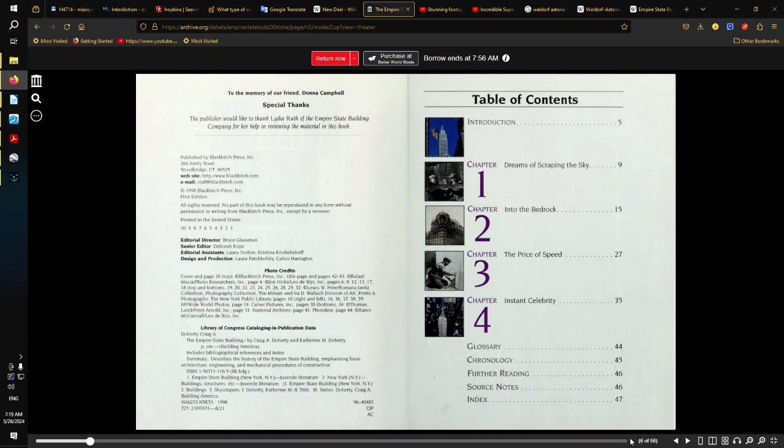So the way things get super weird about this is, officially they say on March 17 the first structural steel was set in place. So keep that in mind, March 17, 1930. And of course, they're saying the demolition was complete in January of 1930.

So I think I'm going to start at the Waldorf Astoria. This is supposed to be a picture of it, not long before it was demolished. The things to keep in mind about the Waldorf Astoria, it was not like a little building or anything. It was supposedly made up of two different buildings, the Waldorf and the Astoria, who decided to become partners at a certain point. As Wikipedia says about the Waldorf Astoria, constructed in the German Renaissance style by Henry Janeway Hardenbergh, it stood 225 feet high, with 15 public rooms, 450 guest rooms, and a further 100 rooms allocated to servants. Now that's the Waldorf.

The thing is, when we put those two together, it's just a behemoth. It's such a huge, massive place. 225 feet high, so it had somewhere in the neighborhood of about 18 floors or so.

But the thing is, when they combined it, so what we were looking at here, Waldorf and Astoria together, connected by about a 300 foot long corridor known as Peacock Alley. After the merger in 1897, the hotel had 1,300 bedrooms, making it the largest hotel in the world at the time.

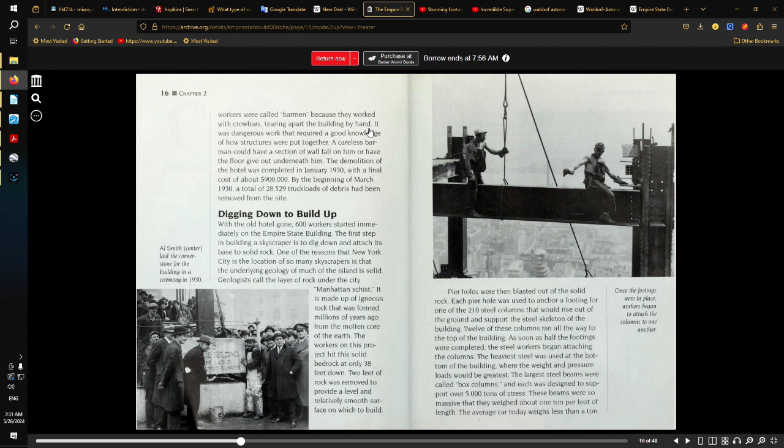I don't know of too many that would rise that high where that would be the case. Again, you'd have to be for sure down to bedrock, and you'd want to tie that in with steel to the rock. This isn't something they say they did, but most tall buildings today use combinations of the two: long pilings down into the rock, and oftentimes a very thick, absolutely supported footer with so much rebar you wouldn't believe it, to hold this tall building in place and level, because the last thing you want is a building that's 1,400 feet up in the air to tip even a little, even a tiny, teeny, weeny bit. But we'll see from the video they've published how they say they did the foundations.

This book mostly goes through the basic kids' story version, but what we have to believe is that they began building the foundation in mid-March of 1930 and finished it by mid-March 1931. And of course, they have to claim they were essentially building 4 floors a week, and that's for the whole thing, not just the steel framing and this really special, interesting terracotta floor plan.

They say they put in these long members, shaped pieces designed of terracotta, that fit together in sort of a puzzle style. Think of how an arch is done with brick, block, or stone, with a keystone in the middle holding it very strong, it was similar to how they say they did that between the steel girders. And then they say they poured concrete on top of that. So there's all that just to the construction of it.

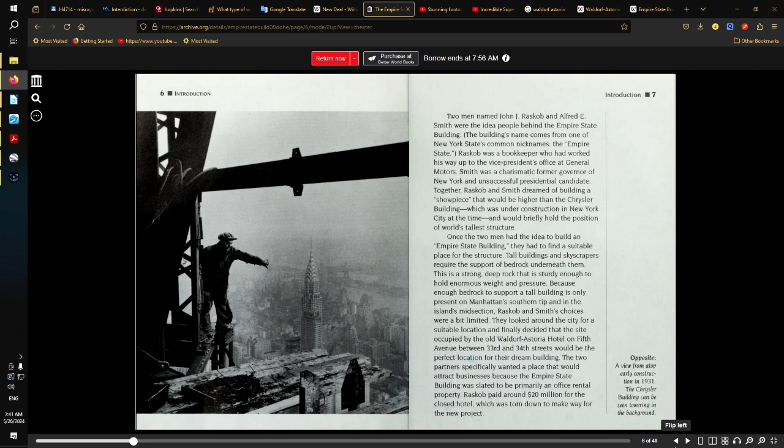So we'll try a few other pictures here. Again, just ridiculous, the things you have to believe about these men. You have to believe they have no safety gear on, and they're on what looks like steel framing a thousand feet in the air, because the only framing members I could imagine being rounded like this would be up in the capital. So we're a thousand feet in the air, up there with those high winds and everything, and they're just hanging out here—this guy's straddling, this guy's just sitting there with his foot.

Well, he's a little more safe than this guy, who doesn't look too right in the head to begin with. No harnesses, not tied off, no safety, high winds. I guess they don't have families to feed. I guess if they fall off this building and die, it won't affect anyone. Good for them.

So again, it's not hard to believe we're looking at a stock photograph, and we don't know how many photographs this regime had, taken from the once likely very prolific amount of dirigibles there were. When you look at some of these Art Deco buildings that still exist from the old world, you see a lot of capitals on them that appear to be, if not a dirigible docking station, something similar.

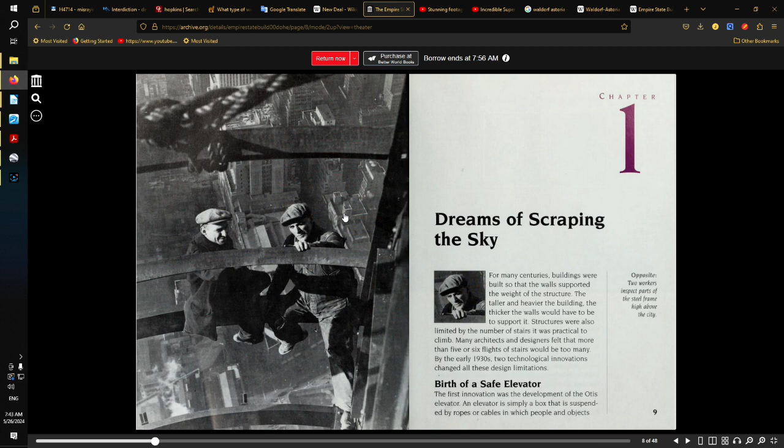And they do admit that somebody had the crazy idea of making that capital at the top of the Empire State Building a dirigible docking port, but the winds were too high and they couldn't pull it off. Well, the funny thing is, if you check other cities in the world, they have the same kind of capital on them. So it appears a lot of people had the same idea - all of them really bad ideas, I guess.

So again, we've got a picture here that's entirely out of context. And by the way, this vertical steel beam we have here does not actually look like the Carnegie beam described in the film. Now, what they say they used for all the heavy lifting on this project were guy derricks - essentially the early form of a crane.

It was essentially built out of steel - well, we had a mast. You would have a vertical mast here, and then a boom out here that would do the lifting. It would swing around 360 degrees, all run by cables.

The thing is, they would have to be secured down to whatever platform they were on very, very well, especially if they're lifting beams like this, which were said to weigh essentially a ton every linear foot. So you got to figure, if that's 30 feet or so, that's 30 tons. We're talking about a crane that really has to handle a whole lot of weight.

And the problem, besides this picture being completely out of context - we have no idea what's really going on here - is that they keep showing us: here it was when they were putting in the foundation, here it was after 12 stories, here it was after 50 stories. Every time we've got these guy derricks up there doing the work, but we have no idea how the guy derricks got up there.

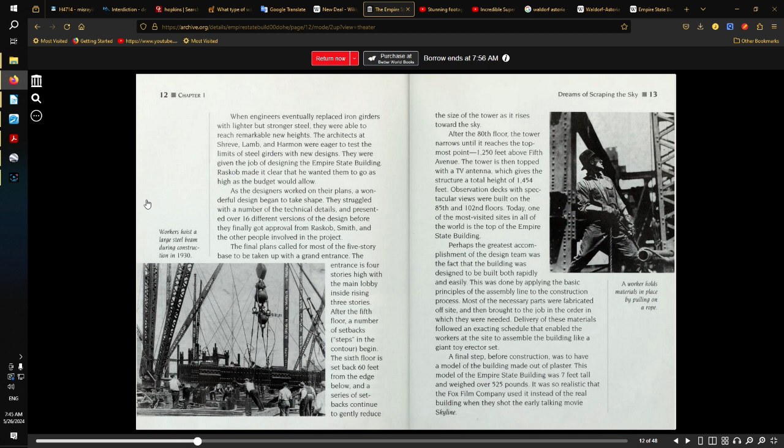The funny thing is, today we have tower cranes used to build buildings. Tower cranes are brilliant pieces of machinery and engineering, and even those, oftentimes, to build them in the first place, you need cranes to build the tower cranes. So I would love to know how exactly they were getting these cranes up story to story to story and still working at such a breakneck speed as they said they did.

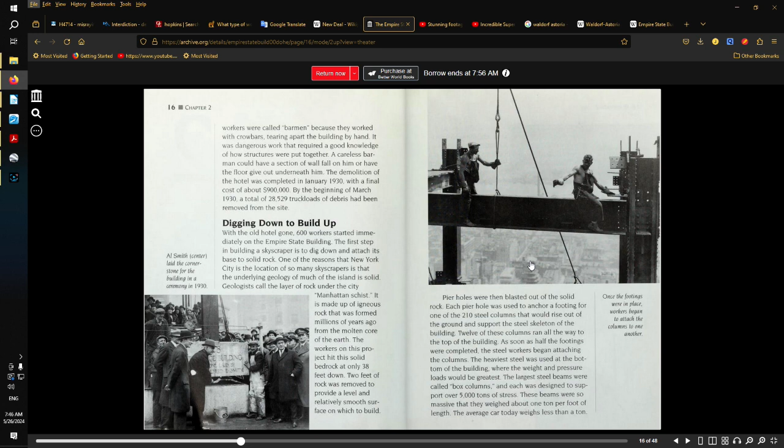So again, is this to the right two construction workers sitting on a girder hundreds of feet up in the air over the city? Or are these two guys on a set with a superimposed city background? It's amazing just how blurry and undefined so many of these backgrounds are.

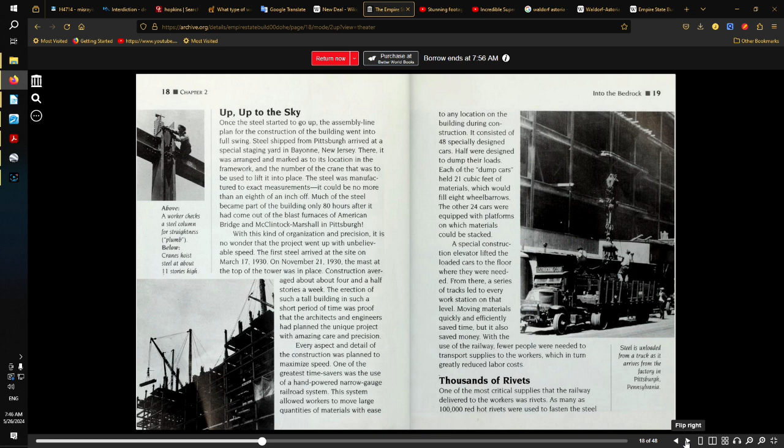Now, there are people who take photos and film of New York, Chicago, and other big cities from the tallest skyscrapers, even on hazy days, and the city doesn't look that hazy. Same thing with this photo - hazy, hazy, hazy in the background, and nice and sharp and clear in the foreground.

And now this one is highly suspicious, because in order to do the steel construction like it was done on the Empire State Building, you would have to connect - we'll see this in the film footage - all of these beams would have been milled, like all the holes for all the rivets, before it was shipped from Pittsburgh out to the site here in Manhattan.

And they would have to lower these beams into place and line up these holes, and then they would have to put in the rivets. The riveting process would consist of pretty much 4 people.

The first guy would heat the rivet red hot. They say he would toss it to the catcher, the guy with the bucket. And they actually claim that these guys who would heat up these red-hot rivets would grab them with 3-foot-long tongs and toss them 50 to 75 feet vertically, accurately. They try to make an excuse for how incredulous that sounds by saying you can throw something vertically farther than you can throw it horizontally. No, you can't. Not if you put a good arch in it horizontally.

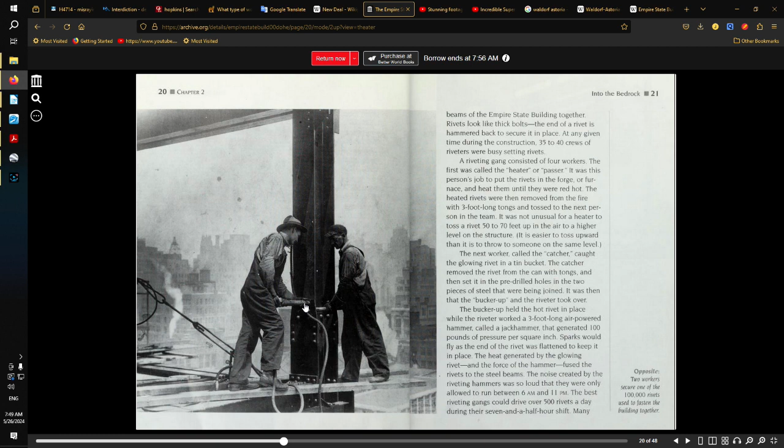The problem is, in this picture we have the bucker up on one rivet and the riveter on another rivet. That's not going to work out too well if that was actually reality. They posed for another picture, and this time the bucker up got it right. Good for him.

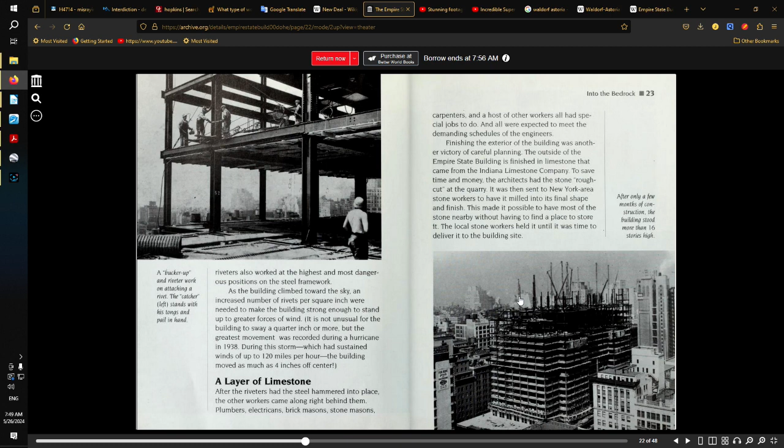Now, of course, we do have various pictures that we're supposed to believe are the building under construction. The guy derricks always look very odd and suspicious in these. In fact, there's one scene in that film where one of the guy derricks, at least the boom on it, looks like it's transparent. Hopefully I can find that as we go.

Now this is one of few photos they claim was an interior of the Empire State Building as it was being formed. Below this little guy having his lunch, these are supposed to be those terracotta boards or beams that would go between the horizontal steel members, the girders. After this we get some more crazy pictures.

Now this is the funny thing. Again we have this background that is extraordinarily blurry as opposed to the foreground. But this is one of the photos I find remarkably incredulous. The caption says, 'Some workers put themselves in great danger while on the project. This man is scaling a cable.'

High above the city with no safety equipment. And we don't see anybody with any safety equipment, because we have to believe they were completely willing to put their lives at risk at all times. And only, depending on what story you believe, only 5 or a dozen men died, but they can't really agree on that, as per usual. The problem I have with this, besides this guy looking like he just came from a deodorant commercial...

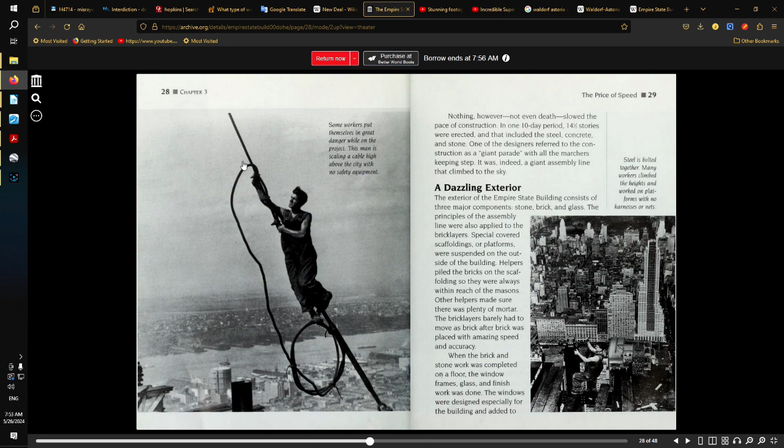So in oversized bibs, he's scaling this wire. We're supposed to believe that he can actually keep himself on the upper side of this wire without falling down beneath it, and that he's pulling this extraordinarily heavy wire up here and clamping it as he goes. Sure thing.

Now, I'm not sure if there are too many other interesting pictures like that in here. There really isn't. Then we get to the finished building, of course, from there to there. So here's the real interesting part. This is the stunning footage of the construction of New York's Empire State Building. They've taken various old clips and put them all together, colorized them, and said they did some digital corrections. It needed a little bit of correction, so they applied that too.

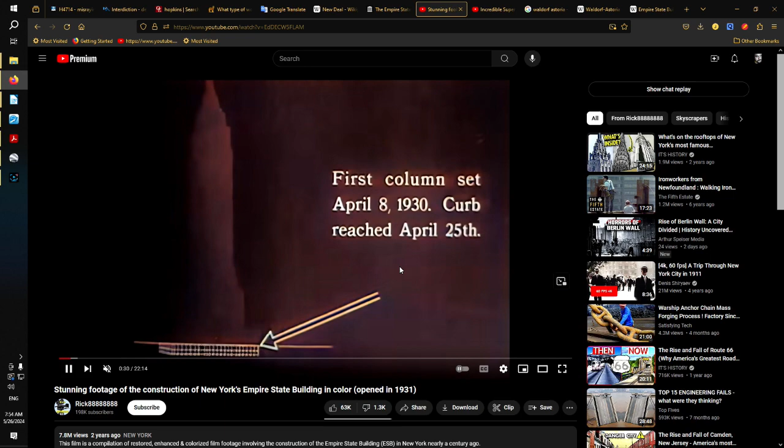We'll start where they say the first column is set, April 8th, 1930, and they say the curb reached April 25th — that's 3 stories underground. They say they reached that point. Now remember, they didn't even start on the foundation until March, and they say they're already setting those initial steel beams, which were a lot different from all the beams that followed them.

They do have a portion in this video of a guy showing how they were constructed, along with animations. Now, something I'd like you to notice: this is supposed to be a sweeping shot of them laying in these special kind of footers that they used. I have to assume, because nobody's talked about this yet, that somehow they tied concrete pads to the bedrock. They say the bedrock is only 30-something feet down from the curb or street level. So we don't really know exactly how they did that.

I would think that would take quite a lot of time and work. You'd want to put in vertical rebar at least, as well as horizontal rebar, and tie that all together. It's a long process and necessary too, but we don't know anything about that. And then they would put the steel, part of the footer, on top of these pads. I believe they would pour concrete all around these, and then those initial foundation beams — these super heavy ones that weighed like a ton per linear foot — would be set on this and erected. Then they would put the girders between, and you would have that first level.

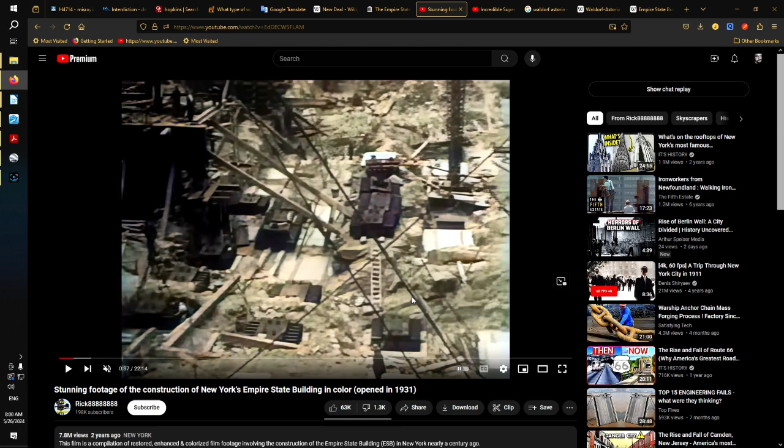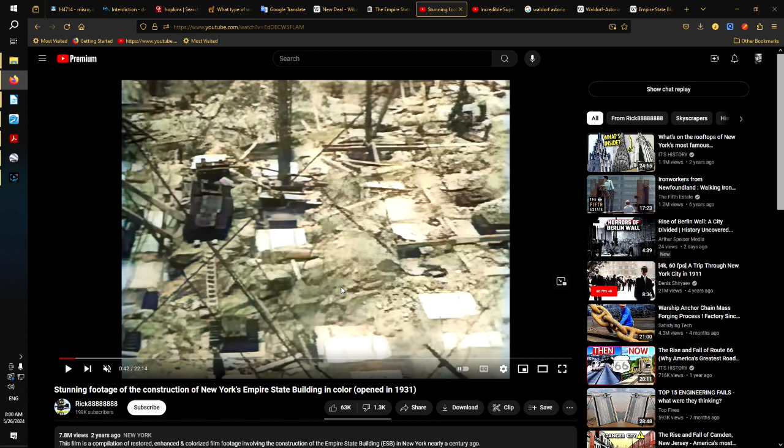They all have to be exactly the same. That's the way that this works. That's supposed to be the beauty of it all. And all of this looks so uneven. It's a shit show is what it is. It is a total shit show. You will not see a serious construction site that looks this entirely screwed in reality.

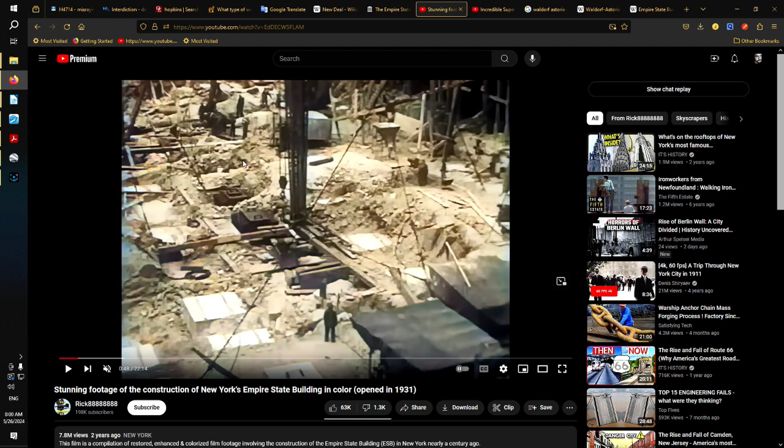This is a movie set. This is moron time, and I don't know what this was. It's a freaking movie set is what it is. This isn't a construction site. This is not a serious construction site of one of the most magnificent buildings in the world. This is a stupid ass movie set is what this is.

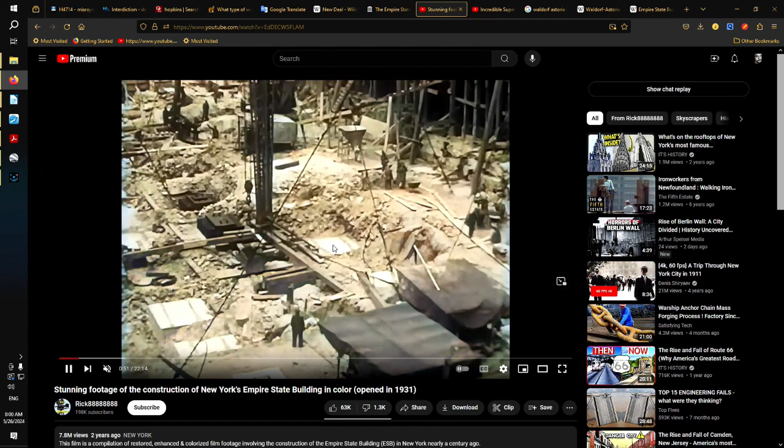So they got a few others, now here, this is the real interesting thing. They do this twice. Now this is for one of the footers that they're supposedly lifting off the truck here. What they're supposedly doing is taking delivery from the street, and then one of these derricks is supposedly lifting it up and over and into the foundations, which went down 30-something feet below curb. But the weird thing is, and we see this a couple of times, they don't show us, if the camera's up on a perch, it can track this piece right here from the street into this hole for the foundation.

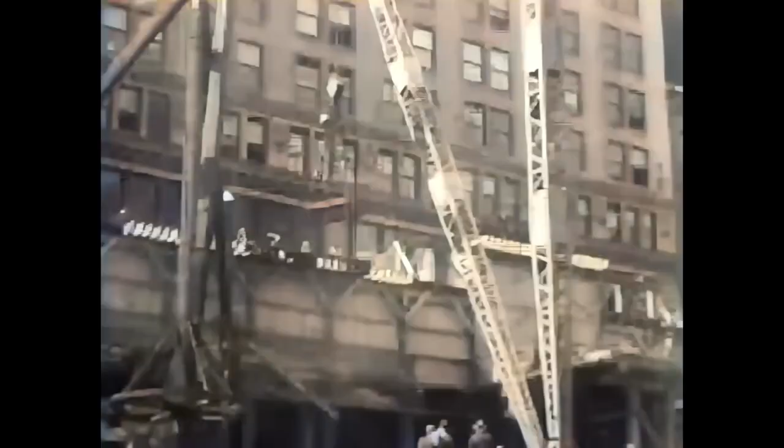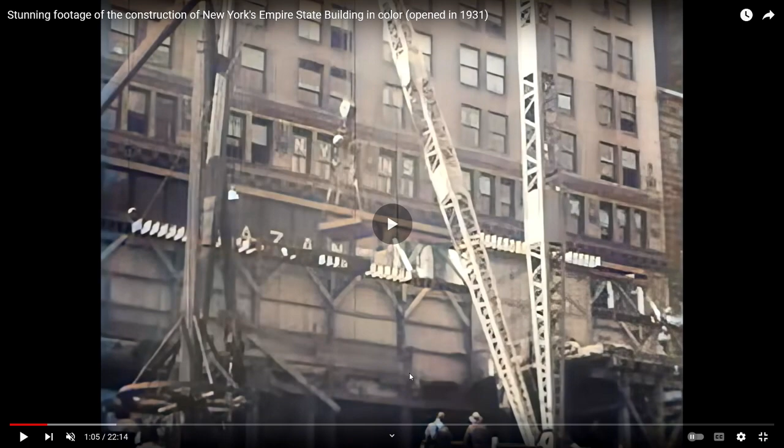But does it? Watch. I'll make this full screen. Here we go, here we go. We're going to pass the curb pretty soon, and then we can see. Oh no, we got to cut. We got to cut to one of the derricks supposedly hauling the same piece, which doesn't quite look the same. We got to cut, that's unfortunate. I thought we would get a full shot just to show us this is for real, this is really happening. But unfortunately, we get a cut.

And this is what I was talking about right here. So supposedly they are placing this on, I would assume, some sort of a pad that they had prepared for it. And again, remember this, folks: all of these would have to be at a perfect level of height, so that all of these components would work together. They would not only have to be at a perfect height, but would have to be seated on these pads, if it were pads, which I would have to assume. And I would further assume the best thing would be for these pads to be at the top of piles that were dug into the bedrock, but again, we know nothing about that.

But the problem is all of this debris we're seeing everywhere, like all these stones and everything. How do we know, with all this debris everywhere, that the derrick operator isn't accidentally hitting some of this when things are going down? A little bit of these stones roll right down in here and get under one of these beams that make up this whole foot right here. Then it's out of level, not at that perfect height you need it to be at.

This whole operation has to be more precision than you can imagine, and we're supposed to believe it's being performed on a site that's this messy. I have problems with that.

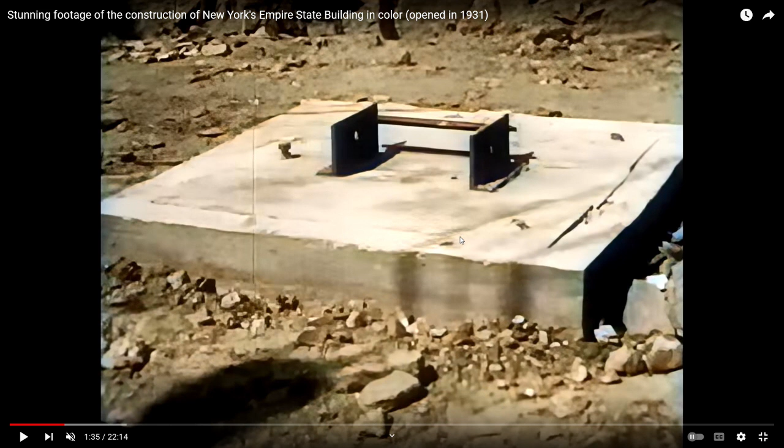So as you can see, this is what it was supposed to look like here, encased in concrete, and then these connectors right there above.

So let's just take another look at the street view, because now they're supposedly hauling a Carnegie beam, which would be one of those foundation beams, set on top of this. There it is, out in the street, supposedly being lifted by one of those original guy derricks they had to build for this whole job. It's going to be going past the curb, and of course this time for sure he's going to pan down.

Oh, nope, he lets us see the people, which is actually different, because in the scene before they were just walking around minding their own business. They didn't care. Well now all of a sudden you've got a crowd gathered, because as part of the story they said everybody stopped what they were doing looking for jobs, because it's the Depression after all. They stopped what they were doing in all of their white hats that look like they got from the wardrobe department, all the same, and they're watching what's going on.

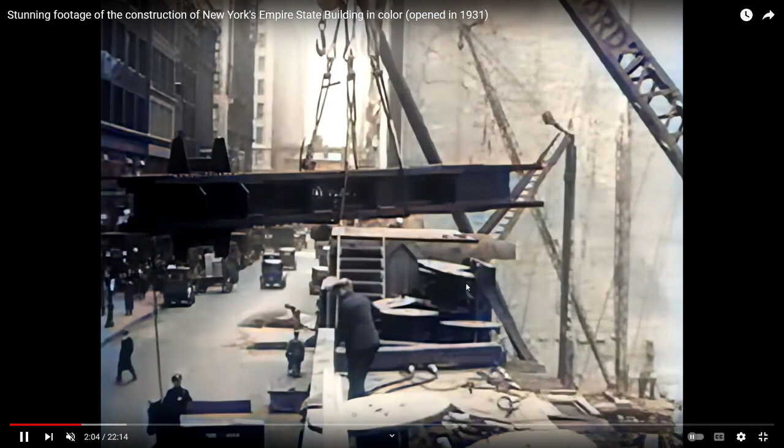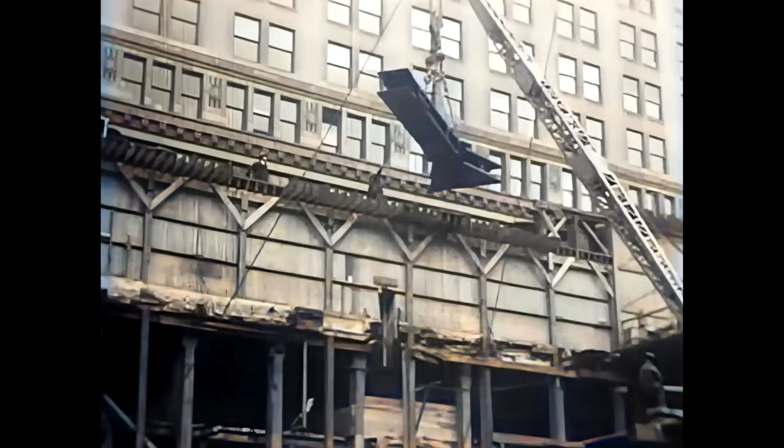But I'm sure, of course, they're going to go back and show us a full pan from the street into this foundation area. Here we go. Yep, no, it's going to happen this time. Yes, that is definitely not some sort of a matte painting or photograph back behind us over here. Of course not. Here we go, they're going to show us. Oh my goodness, again a cut. That's so unfortunate, we get a cut again. Darn it.

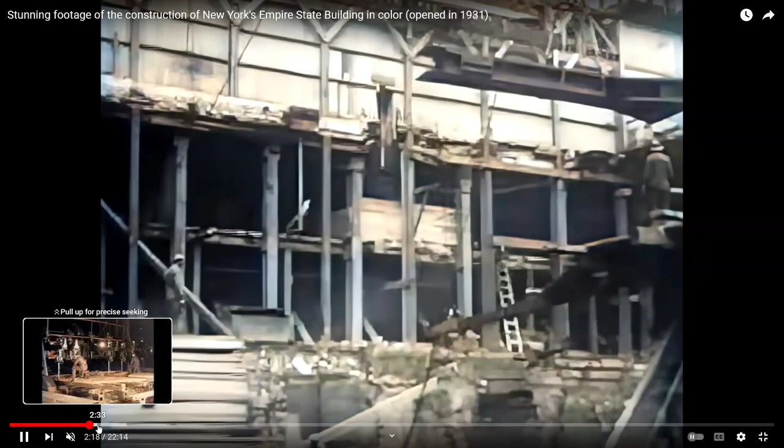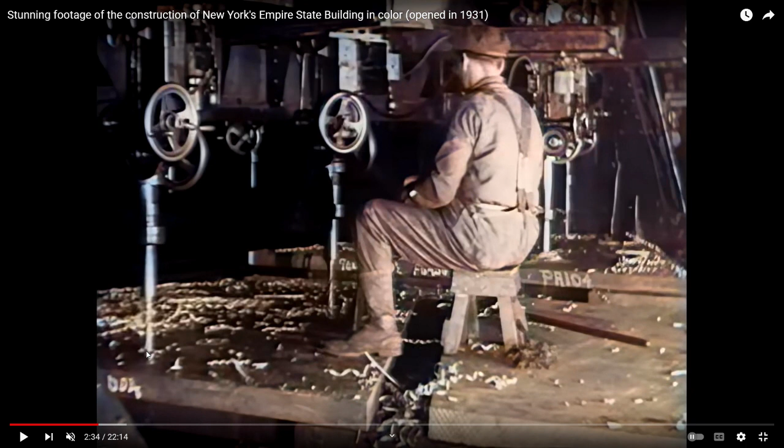So anyways, from this messy, messy, messy set, we go to the mills where they are supposedly drilling all of the holes they would need in these wing plates to put on this foundation beam, this Carnegie beam, they call it. They would have to drill all of them super precise so all of these fit together super precise, which is again why I said all of those concrete pads had to be super precise as far as their height goes, because this was like an erector set, except far more precise. Everything had to fit together in a very, very specific way.

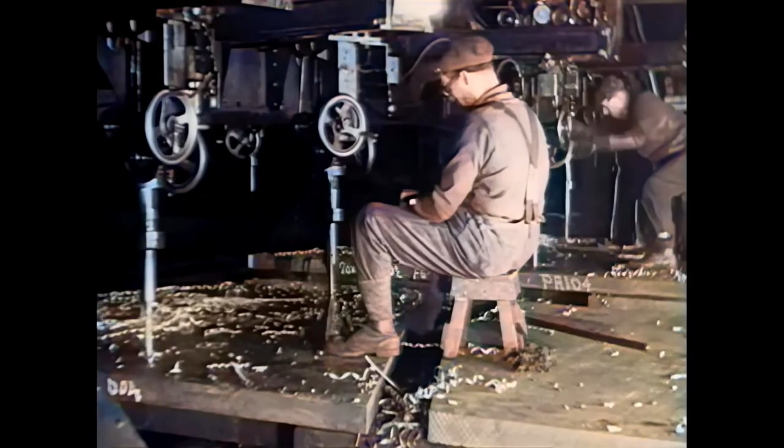But we are about to see some magic. We are about to witness in this film magical steel. Right here, I'm going to show you.

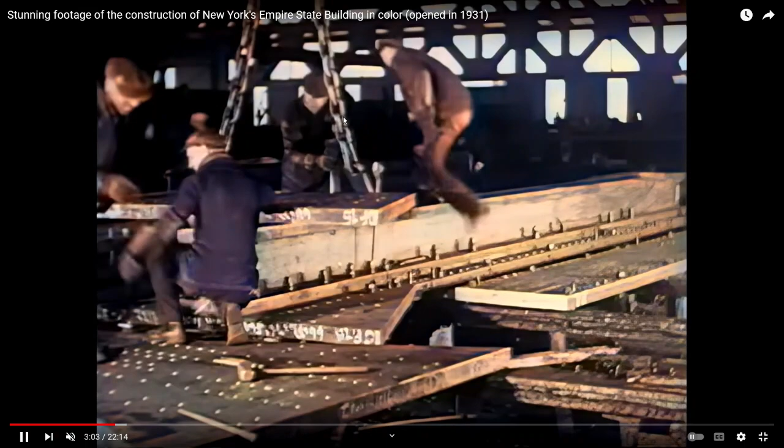And one thing I'd like to point out is how shiny their chains are. Look at that. I have never seen chains that shiny in any steel mill, any foundry, any situation like this. But boy are those shiny, I mean it's like they just came in on the truck. Look at that, man, lucky guys with their shiny chains.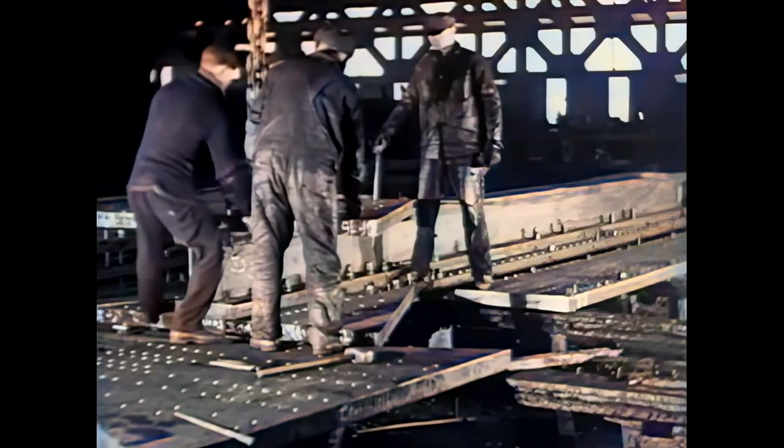So apparently they are setting the wing plate for this foundation beam, this vertical foundation beam. Now here's the part where things get funny. This is where steel behaves in a way you would never expect steel to behave. If you look at this plate they are about to lay down here on this beam, it's got to be 3 inches thick, it's got to be 2 feet wide, and we're going to say it's probably only about 20 feet long-ish.

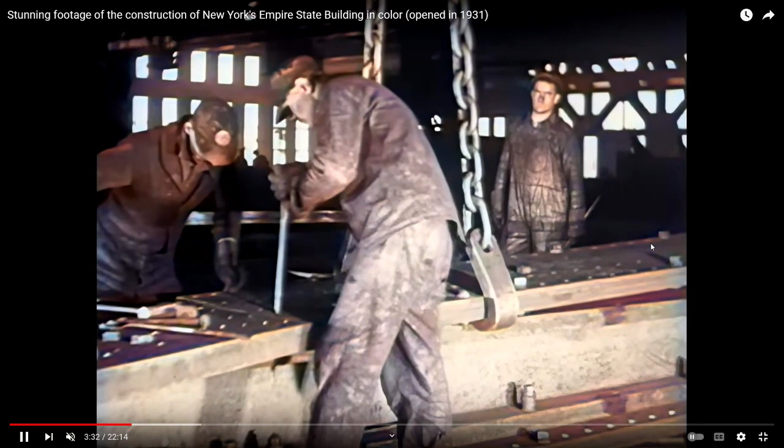But I want you to pay attention to the way this steel plate, in this movie that tells us this is the guys over at the mill putting together these beams for the Empire State Building, I want you to see how this steel plate behaves on the shiny chains, because they got shiny chains back here too. Anyways, you see it back there? Now, doth my eyes deceive me, or is it actually flexing? This 3-inch thick, 2-foot wide, at least 20-foot long steel plate. Did I just see it flexing? There's not a chance I just saw it flexing. Let's see.

Here we go. They're going to lower it into place so it's all nice and perfect.

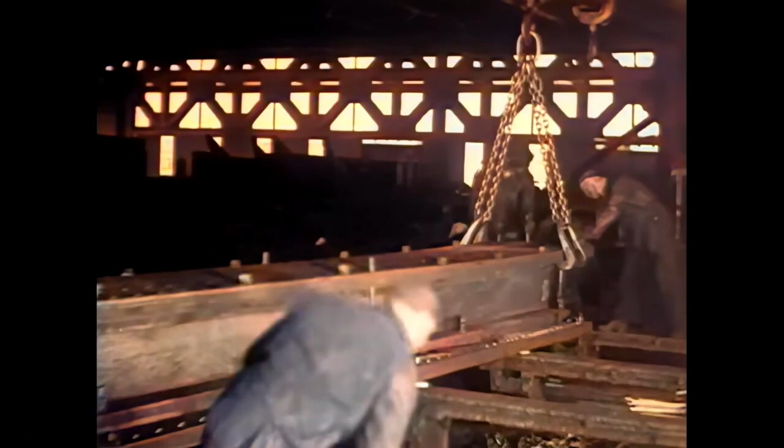Whoa! I don't want to have to draw a straight line on the screen just to prove it to you folks, but that steel plate looks like it's all curving and flexing. Let's see, yeah there it is. It's just bloop, going right into place, like rubber steel, or maybe magical flubber steel. It's the Carnegie flubber steel beam. Wouldn't you like to use the flubber steel beam in your building? That's what I want, a building that acts like rubber.

There's just not a chance. I'm even going to show you, because when I saw that I'm like, doth my eyes deceive me, or is that really bending? It shouldn't, so this is okay. It's not exactly the same dimensions, it's 4 foot wide, but it looks like just about the same thickness, 3 inches. So I wonder if, oh hey, look at this.

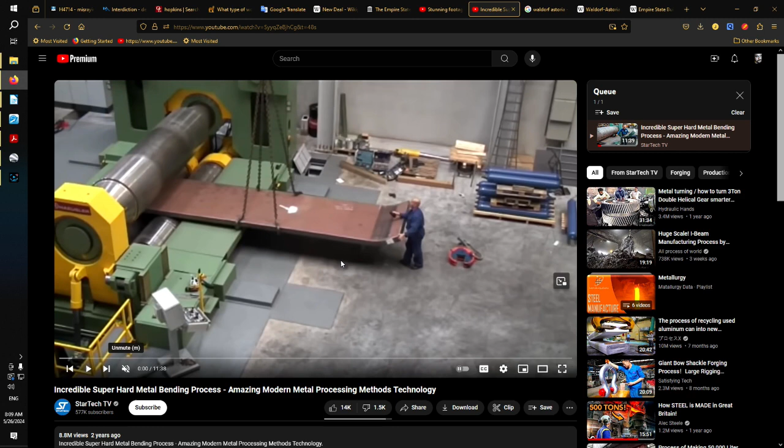By the way, those chains aren't nearly as shiny as the other guys had. They're lucky, they got the shiny chains. So let's see if this flexes. It's not flexing out here at all. Boy, that looks really rigid, really super rigid. Oh, how about here?

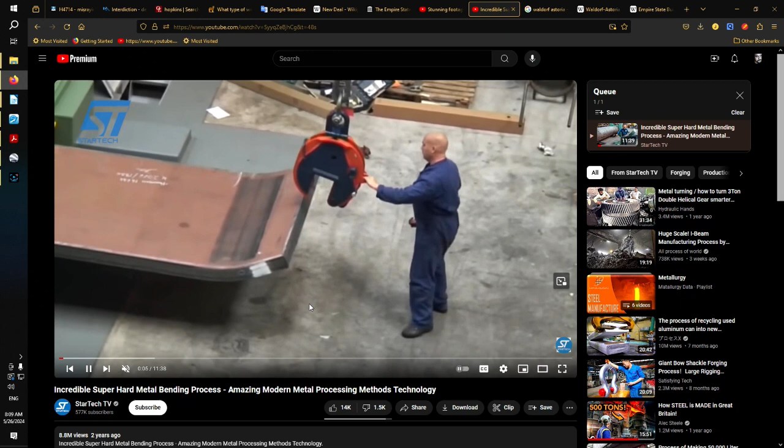Oh did you see that? Look at that, let me see if I can back that up. I can. Okay, watch this cable, this cable's actually lifting this so it can go through a roller. Now this roller on this enormous press is putting, I don't even know how many, thousands and thousands of pounds of pressure on this so they can bend it. It has to apply ungodly amounts of pressure on this plate just to bend it.

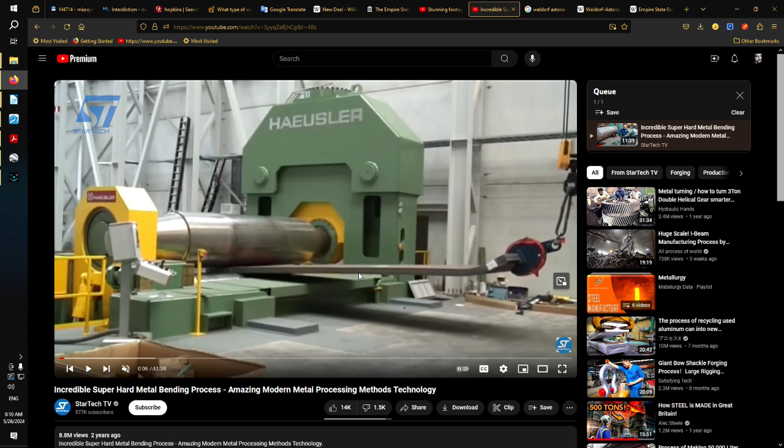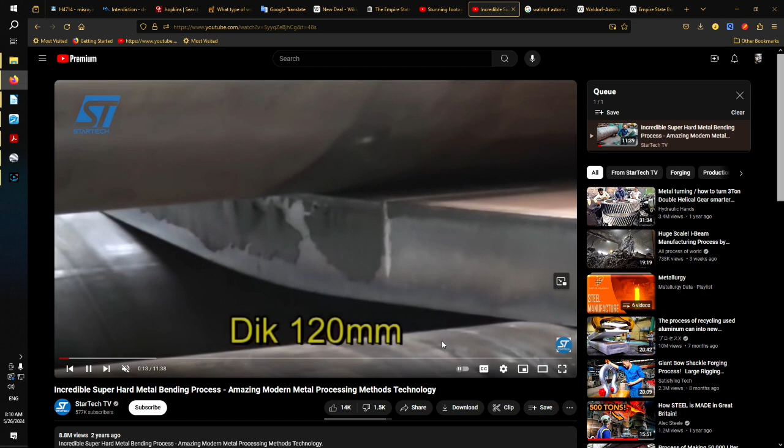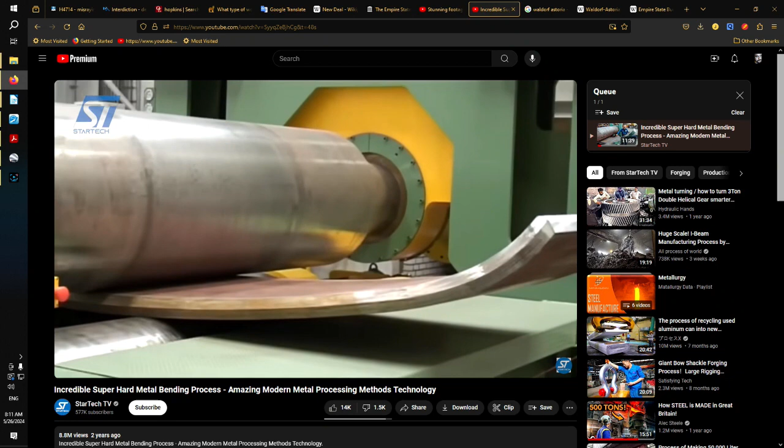Now they're lowering it down with this cable as it goes through this machine, because I'm imagining they want it to go through at a certain angle, and then they're allowing it to lower as it goes through these rollers. Let's see, once it lets go out here with all this hanging out, if it bends a little for us. Nope, oh nope, it's staying right up at the angle that it's coming off those rollers from. It's staying right up at that angle, it isn't bending at all. In fact, they have to apply, I don't even know how many pounds - people that know a lot more about the way steel is bent and shaped.

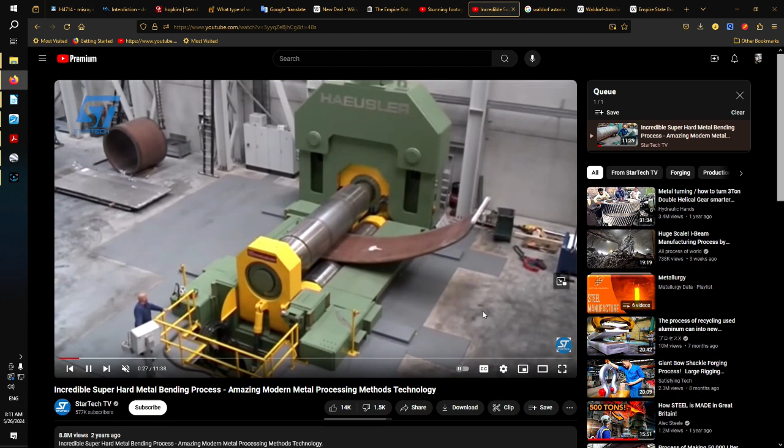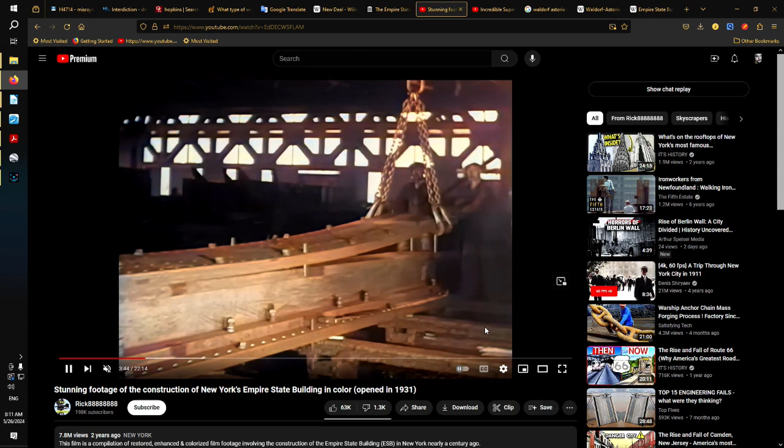Oh wait, do you think it's going to bend when it comes out? Look at all that plate hanging out of the rollers here. It's not bending, it's not bouncing, it's not moving. Look at that, right up in the air, all proud. But apparently this one here, take a look. Watch it flex as the guy walks on it, and the shiny chains let it drop into place. Here it goes. Wait, no. There it goes. Yeah. Carnegie flubber steel, folks. It's magical.

And then after that we get some animations and explanations of the Carnegie beam and so on. Is the beam the guy pointing to different parts of real? Is it a real steel beam? Is it the real Carnegie steel beam that went into the Empire State Building? Did Carnegie even exist when this was built? I doubt it. But here we are, back to the most atrocious looking job site I've ever seen, bar none, hands down, nothing even comes close.

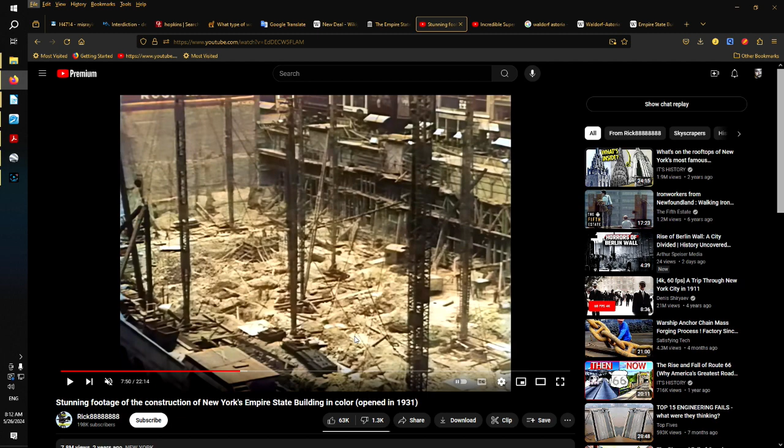And then they go back to just giving us some shots of the derrick, it's picking up stuff - we don't get, again, from curb into the job site, nope, we just get that interior. And then they start showing us some crazy things that I remember from some of Terry Gilliam's work - he was the animator for Monty Python, and he incorporated this into a few of his films, most notably Brazil - these interesting ways they have of simply overlaying a lot of things on the front and showing more isolated action behind that.

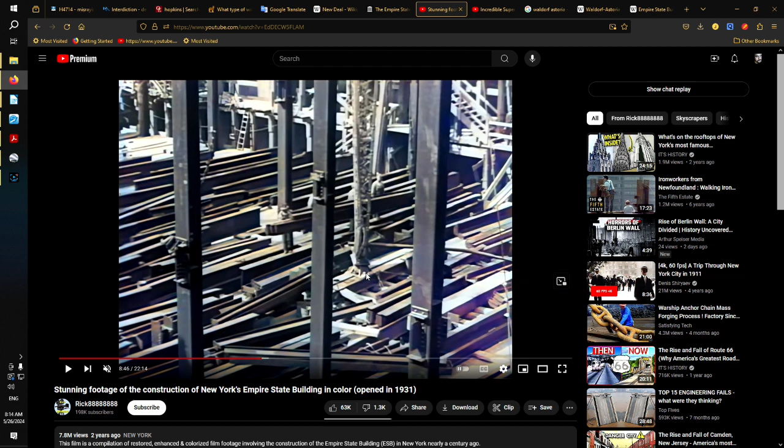And that's assuming they are using equipment and methods as antiquated as they say. And again, one way or another, I want you to look at how freaking nightmarish this site looks that these men are supposedly working on. It is a bona fide nightmare, a nightmare. And what am I supposed to believe, that this guy, derrick, is only attached by some bolts to a couple of beams right here? Is that what I'm supposed to believe? Jeez.

Again, same thing. Do we know that that's a steel beam right there, hanging all crazy like that? And it's actually holding all crazy. They would say they had this method of standing it up, and they'd have to be very careful about it. This is tons of steel, it's going to kill somebody if it falls. And they've got everything all willy-nilly everywhere. A total mess.

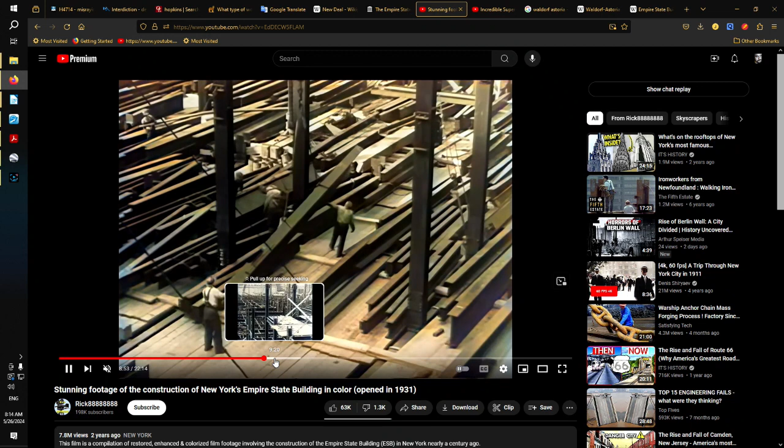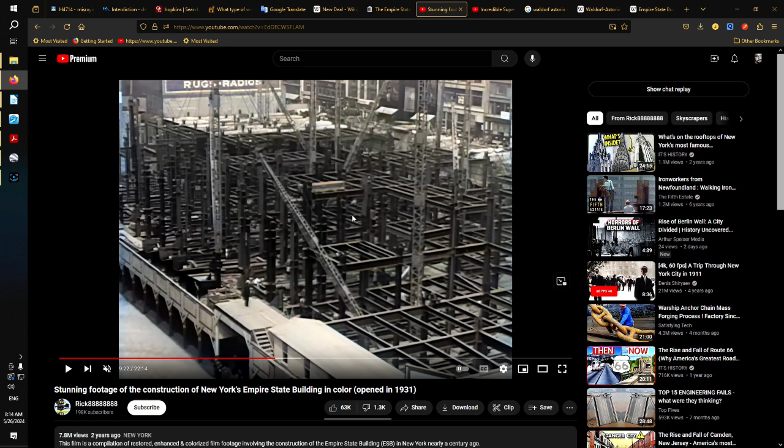Same thing with this right here. We're supposed to believe that this is footage of them building the Empire State Building here. Again, things like this, it's not that hard to animate them in. Oh, I found the...

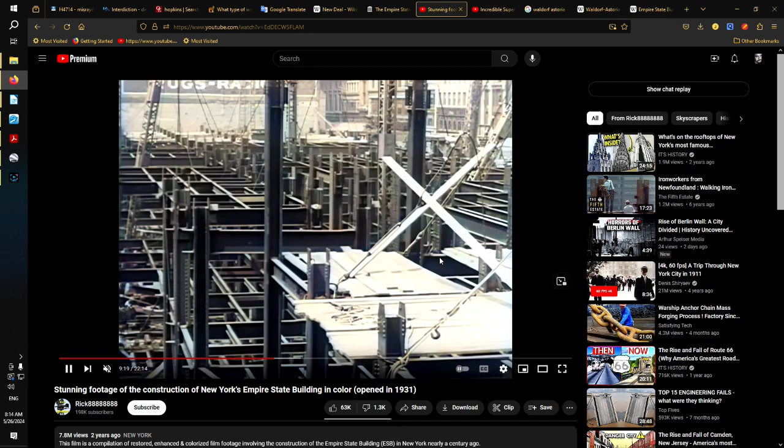The transparent derrick. I'm sorry I don't have this blown up, let me take it to full screen. The transparent derrick. Look at the boom on the derrick. Now, I think technically this would be the boom and not a jib, but I'm not a craniologist.

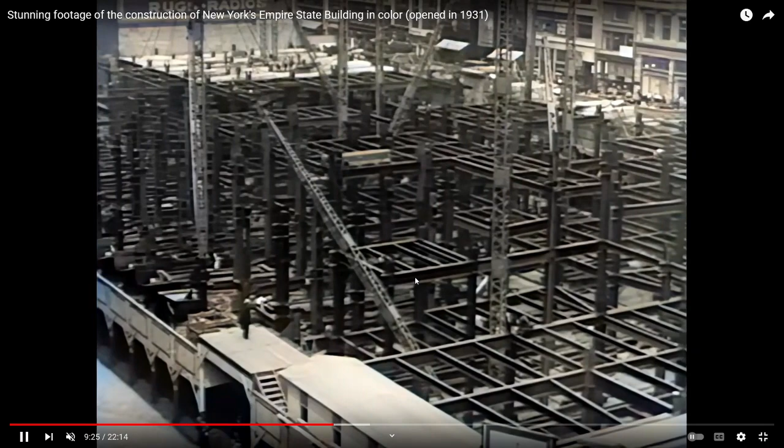However, let's just call it a boom for shits and giggles and take a look at the girder that is supposedly behind this boom. I want you to take a look at that because I can't really zoom this in much more, and I don't think the camera's going to zoom in much more, but you can clearly see that girder behind - no, it's not the lattice. You can see it just running through that boom right there. You see it running right through? There should be steel, solid steel right there.

Trick of the light, right? Is that a trick of the light? I don't think it is.

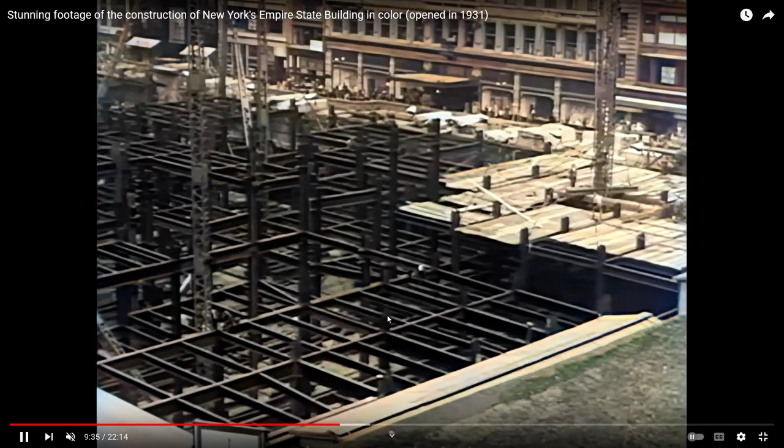And I will point out one more thing that I think is really funny. They claim that this was such an impressive operation, of course, because it would have to be, that there were people just lined up in droves on the streets and sidewalks just watching them do this work, which, again, I would think even across the street on the sidewalk would be a little bit dangerous when we consider how screwed up some of the things they say they were doing was. I mean, you're telling me all kinds of materials weren't falling because of the hubris of these men.

And you'll see, I'll include that clip in here, but the thing I think that is strange is we are supposed to be looking at a number of scenes as they're building up buildings that were essentially supposedly across the street from the construction site where they're building the Empire State Building.

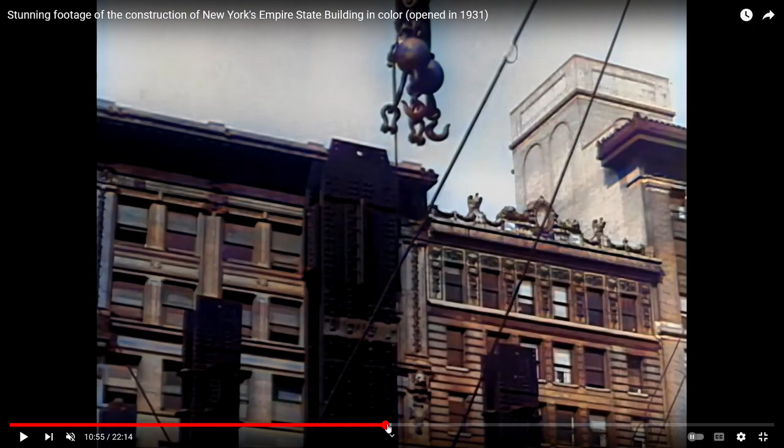One thing I noticed that was strange is if droves of people, as they say, were gathered out on the street at all times of the day to watch them work, why don't we have all kinds of people in these windows just watching them work all day? You see almost no movement from any of these windows in any of these buildings ever. I think one time, maybe, and I can't even remember where it would be, I might have seen one person in one window somewhere. That's it.

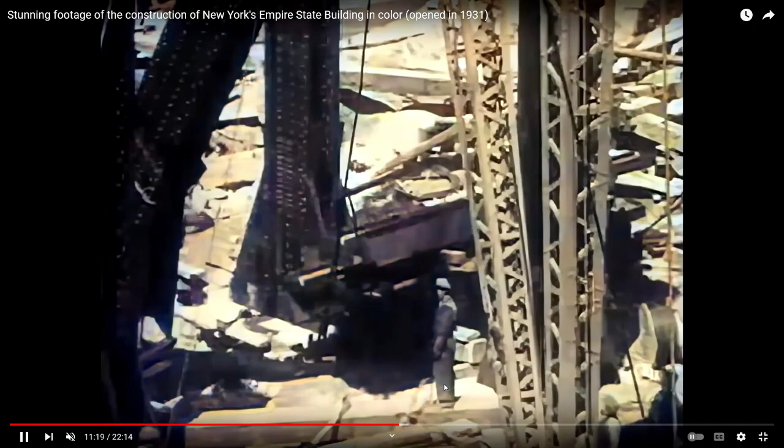And then they're giving us the messy site again. So as you can see, these would be the foundation, because they just, for some reason, were at the 12th floor and then they cut back to the foundation. So these are supposed to be these Carnegie beams with their wing plates and everything set in, all ready to go. And again, all these pads would have to be perfectly level with one another, all of them - perfect, absolute perfect level on this messiest of messy job sites imaginable.

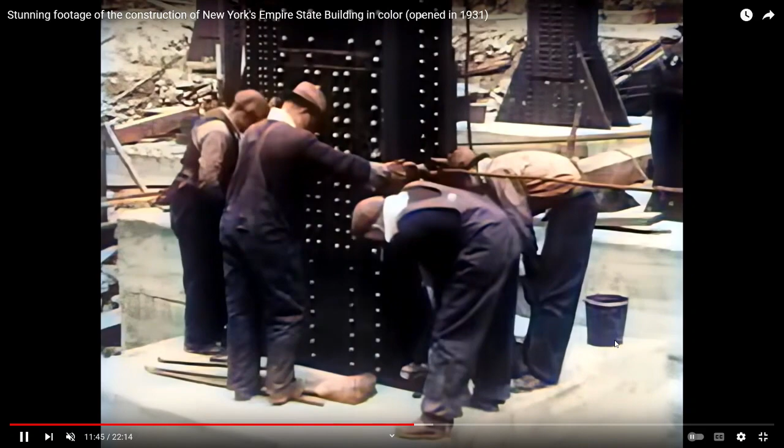And then we've got a few clips of them supposedly setting one of these. They don't actually show us from that one guy trying to manipulate it to it going in place, we're just hammering it in here. Again, they're just recycling these clips.

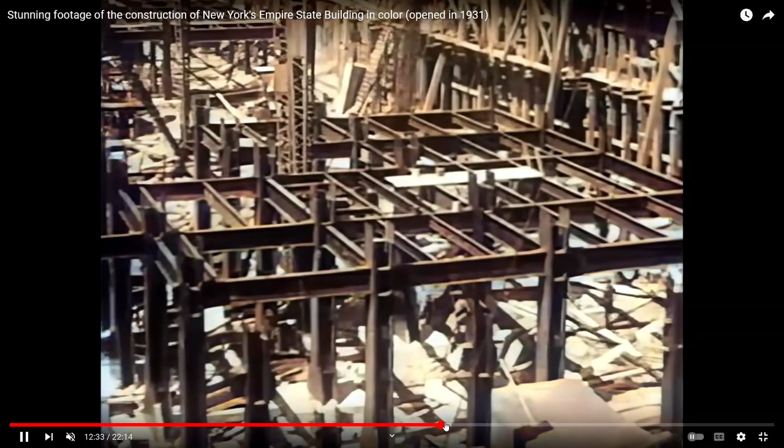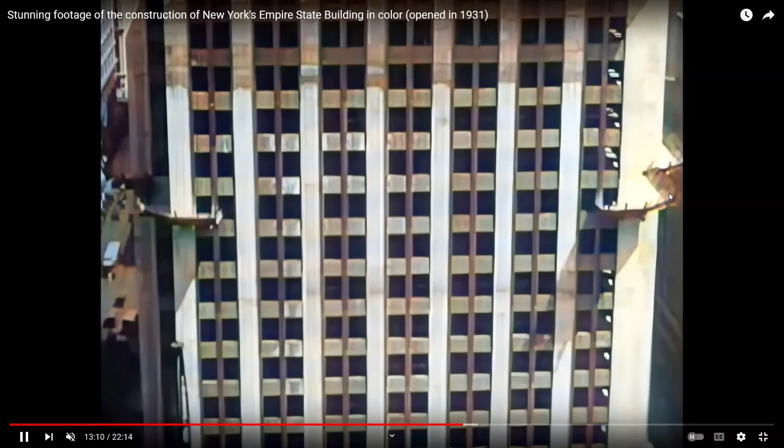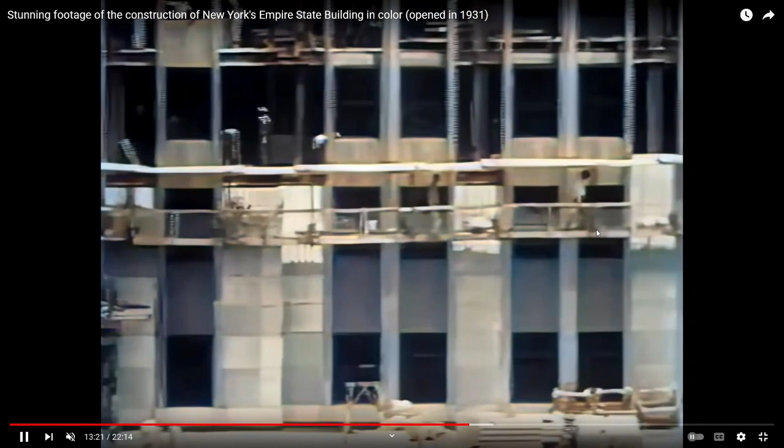And now they say on the whatever floor, and then this is supposed to be a pan up the building. Remember, they had models of these buildings, for one thing. And I believe this is all supposed to be like wooden built walk planks and stuff, which is just beyond ridiculous, it really is. This thing had a big droop in the middle, because I definitely want to walk around on that - big old droopy wooden walk planks. Sounds like a good time.

Supposedly putting in there were these decorative aluminum plates that ran vertically up. I don't know if it was all of the building. I'm going to give you one that I think is kind of funny.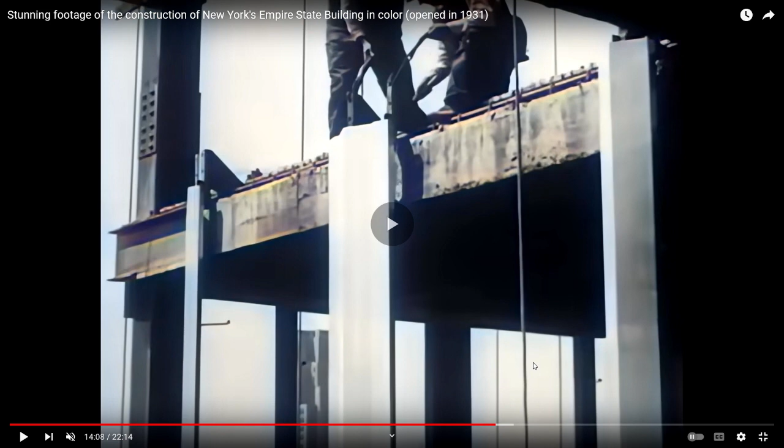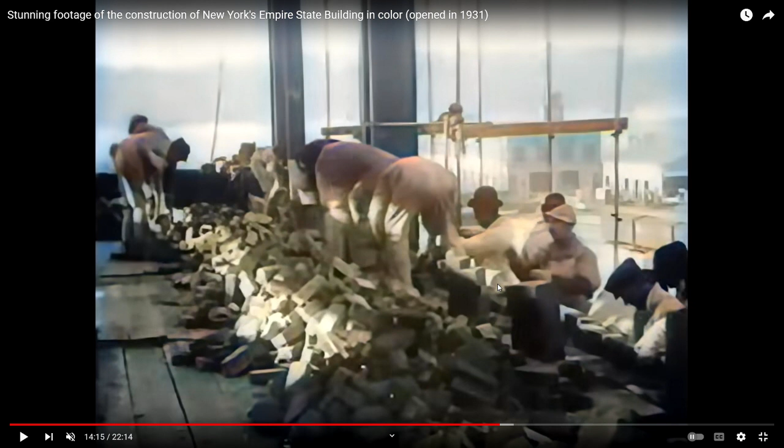This is supposed to be them working on it, laying in brick at various portions of the building where there would be brickwork instead of the limestone and granite and other things. First off, that is the mess of messes right there. Most bricks are going to be delivered on pallets neatly so you can do your work quickly and in an organized fashion. This is not - just like the foundation being such an utter mess, this pile of random bricks is just the worst thing I've ever seen.

Now these guys out here are supposedly laying bricks. And if you've ever seen a real professional bricklayer, yeah, they're fast. They get a brick on, grab some mortar with their trowel, butter that next one so fast and get another one on. If this were really happening, it would almost be like a ballet between these guys handing over the bricks and buttering them, just getting one layer after the other. It really is something when you're looking at real pros.

But we look at something like this, and I want you to pay special attention to the supposed bricklayer in the bottom right of this scene. This guy right here, he's got no mortar on his trowel. Did you see that? Not at all. And he's acting like he does, like he's scooping up mortar onto the brick. He's doing nothing to the brick. Oh no, we're going to take a minute and make sure that brick is perfect. There's not a chance - he was buttering up nothing. He had nothing on his trowel that any of us could see.

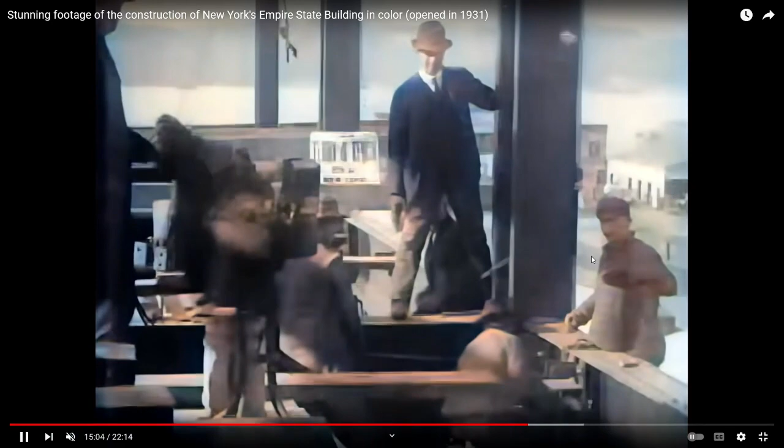All right, so the bucker up is supposedly putting that rivet in, pounding it in. Well, that really took some force to get that in. And then he's supposed to be holding it while the riveter - where's the riveter? Where's the riveter? This guy over here, he's doing something else. He didn't realize he was supposed to be the riveter. There's no riveter. They're all just looking around like, are we doing this okay?

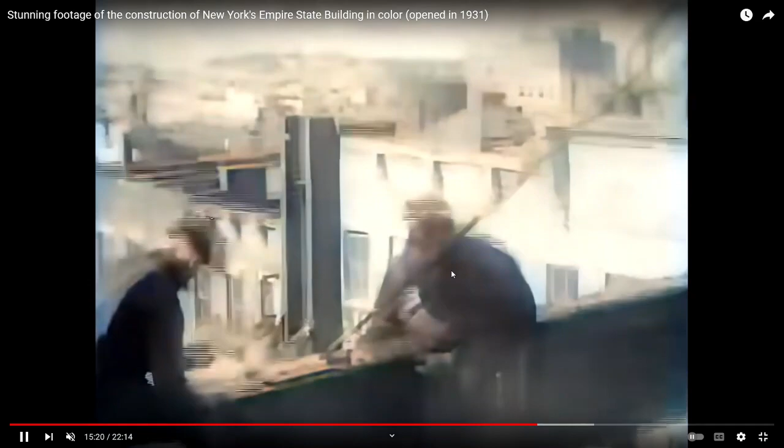Now you see these two guys supposed to be putting up a girder, right? This guy's out here on some vertical beam - we don't know why, climbing it like a ladder. And he's just looking around like, hey, is this good for the scene? Look good? Do I look like a sky boy? Can I get down now? Okay, thank you.

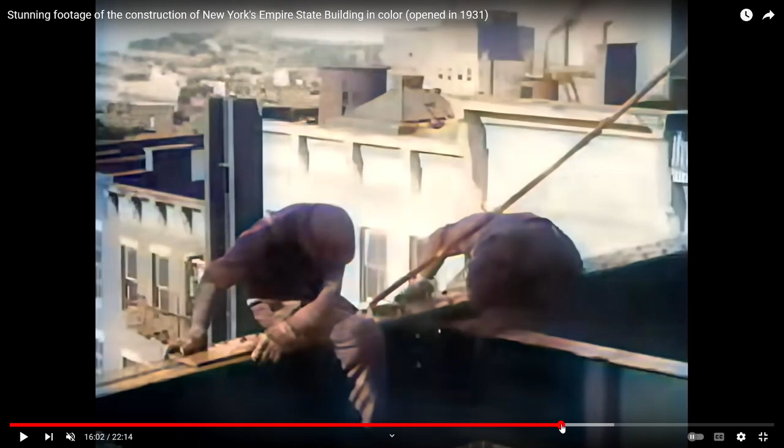It doesn't seem to represent actual work. And then they show us these really ridiculous things like the foreman, which I'm guessing - he looks like he's dressed like a foreman, even though all these guys, what they're wearing, their suits to work. It was the Depression - it was the only clothes they had.

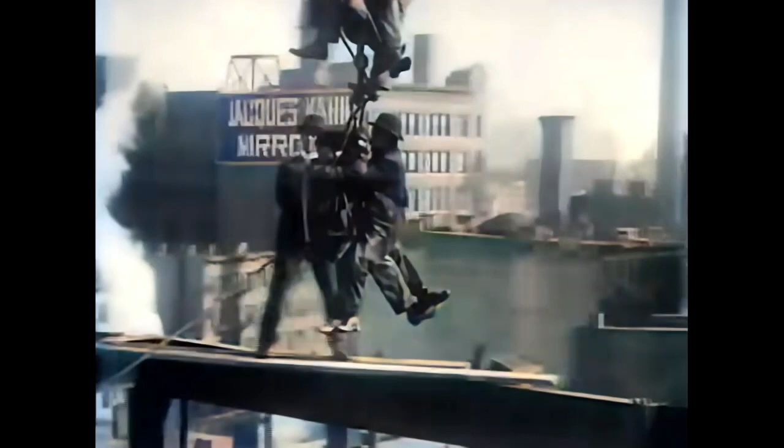And he's going to swing them out. What are they, at this point, at least 100 feet in the air, right? Based on the buildings around there, they'd have to be. We're going to swing them out in the air - nah, they're not going to fall, we know it for sure. Are they tied off? No, probably not. Hey guys, something for the cameras - let's give them something at home to look at while you're suspended at least 100 or more feet in the air, enough feet to where if you fell you'd die. Let's give them something to see. Yeah, wave your hats at them.

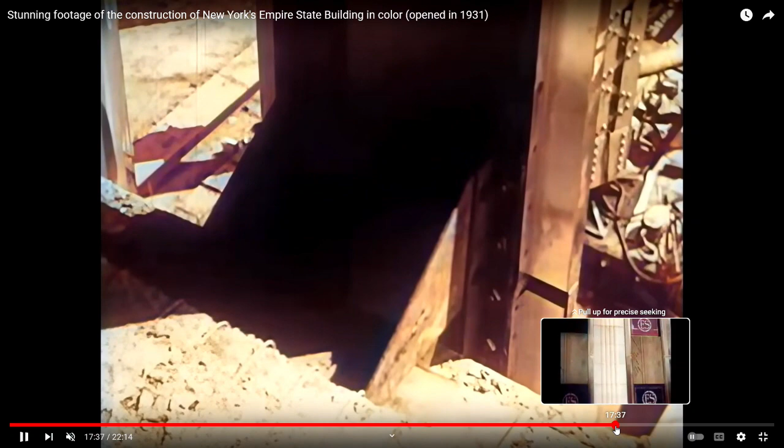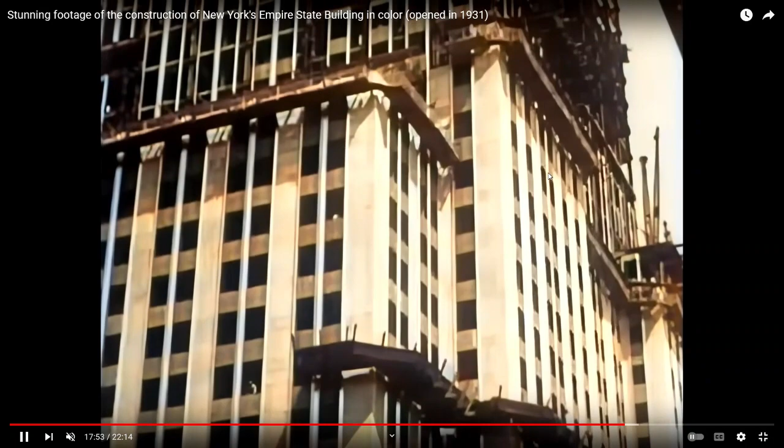Only hold on with one hand because it's only your life, and of course that doesn't matter. After this, we basically just get footage of supposedly the finished Empire State Building. Or they'll give us a couple of scenes that would appear to be, see, this is it, still in construction. We have no idea if this is a model whatsoever.

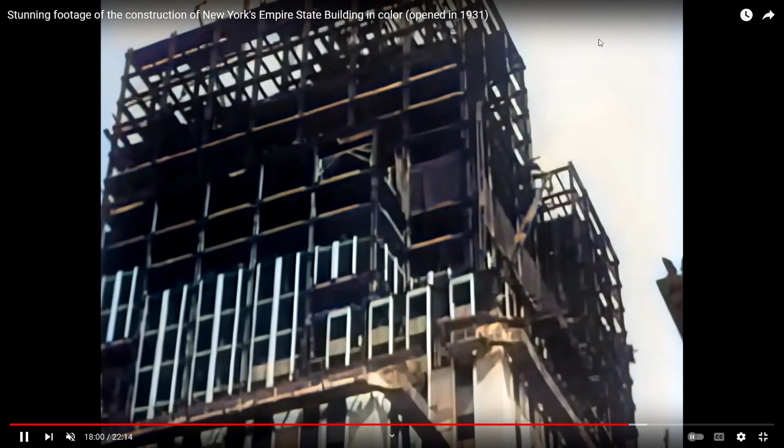They can do so much with miniatures and bigatures, washed out sky. We have no idea. Again, the derricks look really weird up there. Oh look, they're patriotic. And then this is supposed to be a scene of them rising up from the city to show us the fullness of the Empire State Building. Apparently more scaffold or something set up here.

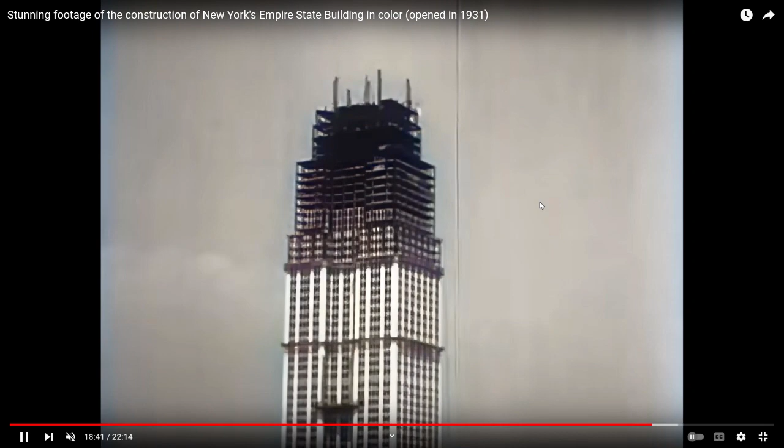Now the funny thing is, how do we know that up to there wasn't footage of the actual Empire State Building so it fit with all the buildings around it? But from this point here is a perfect point to cut it off and just insert the model, the rest of the way up, even if they had to use models. As opposed to something that they just designed artistically and inserted.

The sky looks absolutely washed out. We have really no way of knowing. And I think there's just one more scene kind of like that. Same sort of thing going on too.

They're trying to show us that while the foundation and the shaft is in and they're just working on the capital, it's the same kind of thing going on here. We have no for sure way, and based on the look of it, could easily be a model or literally just an artistic rendering inserted in front of a sky that they had captured. We have no way of knowing.

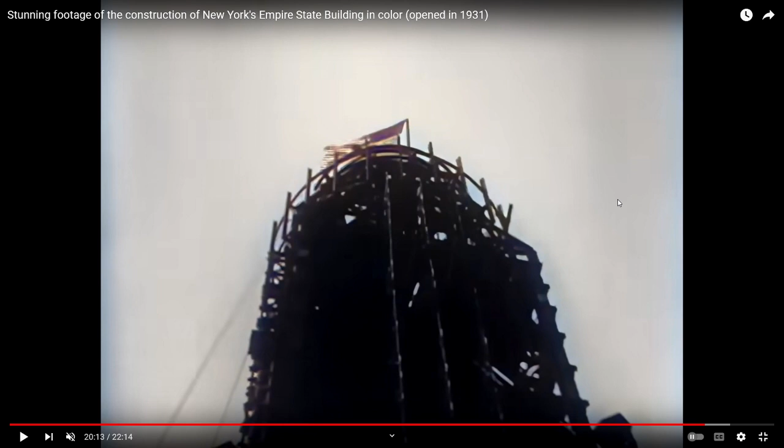And again, when you consider the fact that the official story behind how fast they said they built that was something we can't witness today. There is a time lapse of a hospital, I think in Wisconsin, going up. Not nearly as big, not even the same footprint, it's smaller. And it took them over 2 years to complete this hospital that's, I don't even think, 10 stories.

And they have all the time-lapse footage of it, over 2 years. So just consider that and think about the fact that they were claiming not only are they building one of the greatest skyscrapers, at least in height, with detail that is beyond impressive. And they're saying they're doing it not only in the midst of this depression, but at the same time as so many other beyond impressive structures are being built.

It's really something. I think there is plenty enough evidence for anyone to look at the claims and say, I really don't think those claims could be verified, and I really don't think they could ever hope to build something as grand and unbelievably beautiful and big as this, especially in the time frame they said they did it, with the economic state they say the country was in, with the lack of records.

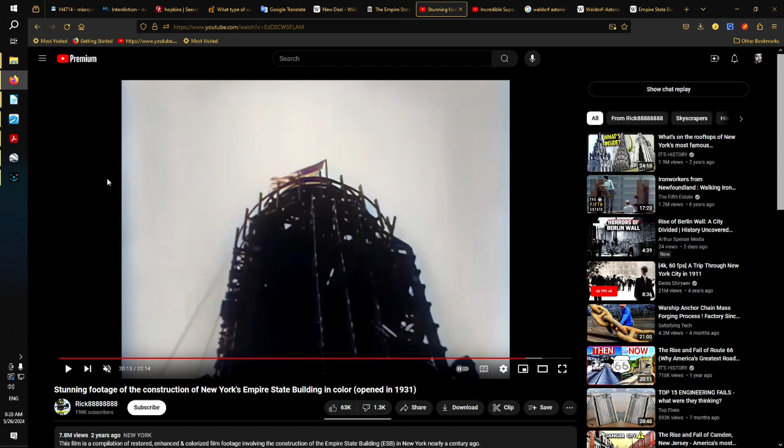And you have to wonder, well, why didn't you bring it back? It's just gorgeous, this style. Why didn't anybody bring it back? I'm sure there's a million excuses they would use, as opposed to the most likely excuse, which is that if we brought that Art Deco style back and tried to start building buildings again like all of these, we would be exposed, because everyone would realize how we could never accomplish such things in anywhere near the kinds of time frames that we claim we accomplished that in.